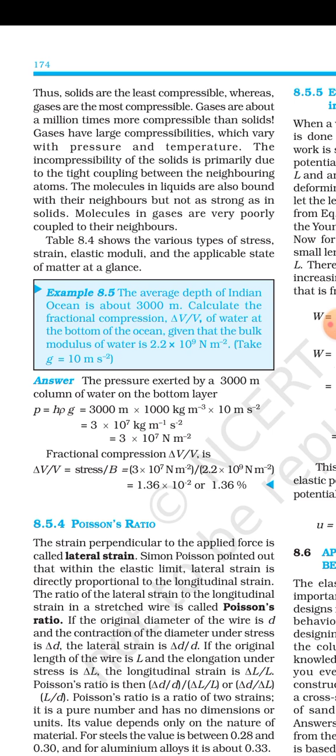The table shows the various types of stress, strain, elastic moduli and the applicable state of matter at a glance that we had studied. Now the question is, the average depth of the Indian Ocean is about 3000 meters. Calculate the fractional compression delta V by V of water at the bottom of the ocean given that the bulk modulus

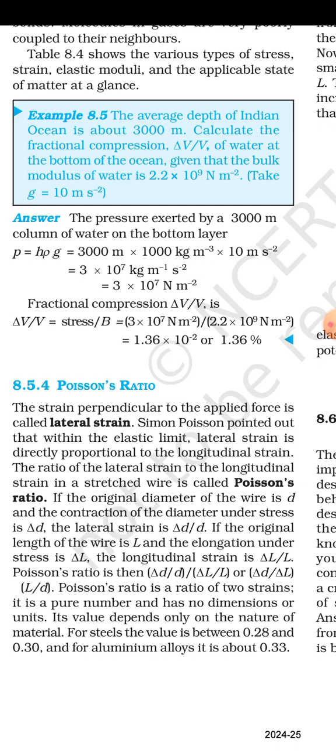Simon Poisson pointed out that within the elastic limit, lateral strain is directly proportional to longitudinal strain.

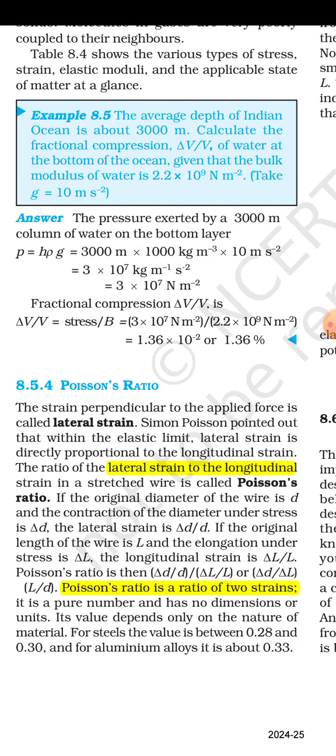It's a pure number, has no dimensions, no units. Its value depends only on the nature of the material. For steel, the value is between 0.28 and 0.30, and for aluminium alloy it's about 0.33.

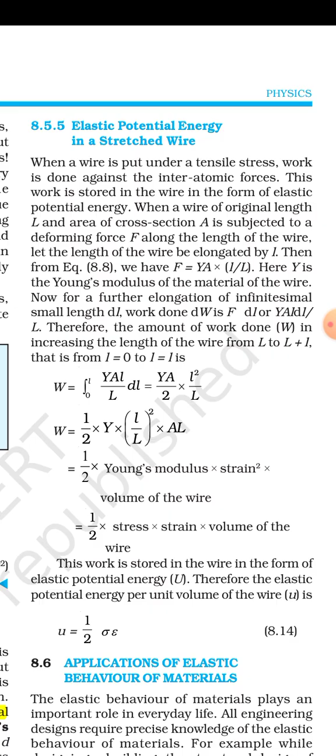When a wire is put under tensile stress, work is done against the interatomic force. This work is stored in the wire in the form of elastic potential energy. When a wire of original length L and area of cross section A is subject to a deforming force F along the length of the wire, let the length of the wire be elongated by l.

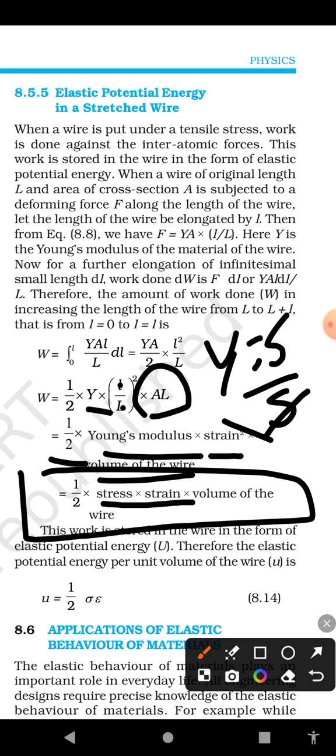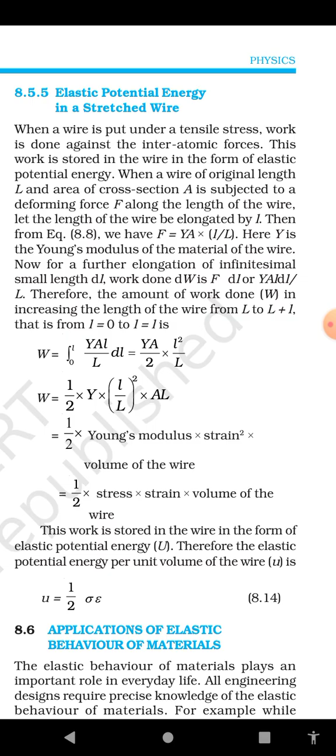The elastic behavior of material plays an important role in everyday life. All engineering designs require precise knowledge of the elastic behavior of material. For example, while designing a building, the structural design of the column, beam and supports require knowledge of the strength of the material used. Have you ever thought why the beam used in the construction of bridge or supports have a cross section of the type I?

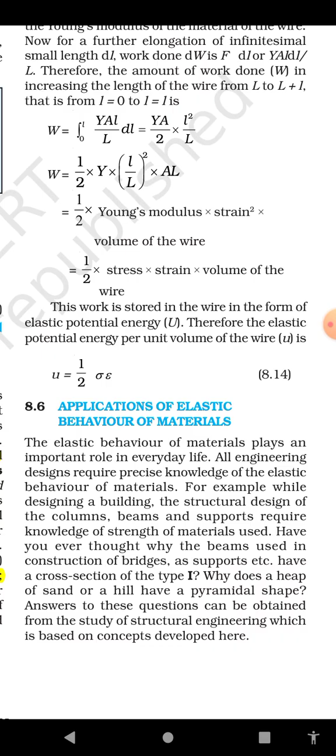Why does a heap of sand or hill have a pyramid shape? Answer to these questions can be obtained from the study of structural engineering, which is based on the concept developed here. Cranes used for lifting and moving heavy loads from one place to another have a rope to which the load is attached. The rope is pulled up using pulley and motor. Suppose we want to make a crane which has a lifting capacity of 10 ton or metric ton. 1 metric ton is 1000 kg.

How thick should the steel rope be? We obviously want that the load does not deform the rope permanently. Therefore, the extension should not exceed the elastic limit. From table 8.1, we find that mild steel has a yield strength of about 300 × 10^6 Newton per meter square. Thus, the area of cross section of the rope should be greater than W by stress.

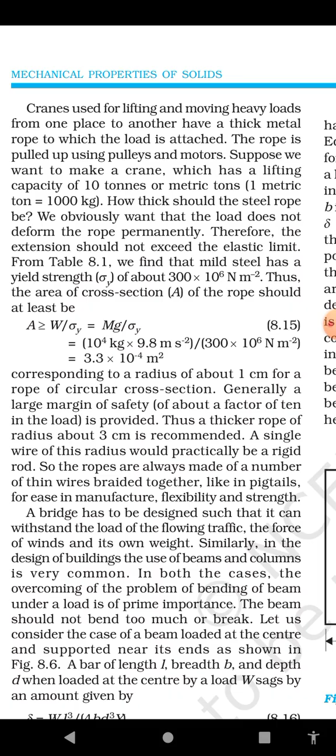For a rope of circular cross section. Generally, a large margin of safety is provided. Thus, a thicker rope of radius about 3 centimeter is recommended. A single wire of this radius would practically be a rigid rod, so the ropes are always made of a number of thin wires braided together like in pigtails for ease in manufacture, flexibility and strength.

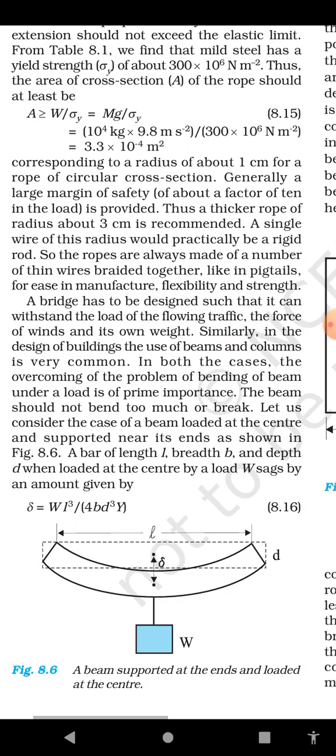A bridge has to be designed such that it can withstand the load of the flowing traffic, the forces of the wind and its own weight. Similarly, in the design of building, the use of beam and column is very common. In both the cases, the overcoming of the problem of bending of beam under a load is of prime importance. The beam should not bend too much or break.

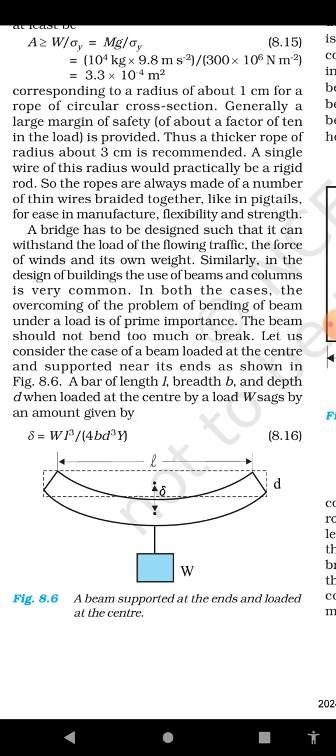Let's consider the case of a beam loaded at the center and supported near its end as shown in the figure. A bar of length L and breadth B and depth D, when loaded at the center by a load W, sags by an amount delta that is given by, you have to just memorize the formula, delta

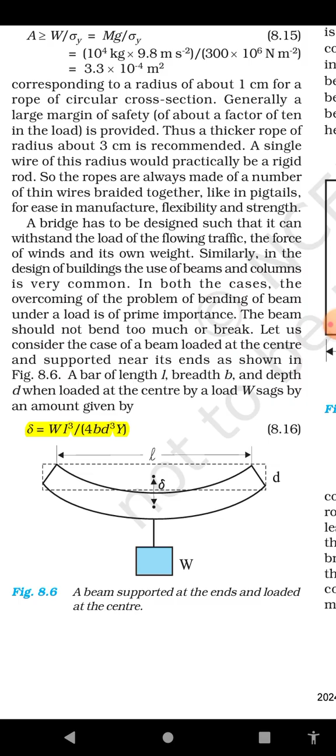The relation can be derived using what you have already learnt and a little calculus. From the equation we see that to reduce the bending for a given load, one should use a material with a large Young's modulus. For a given material, increasing the depth rather than the breadth B is more effective.

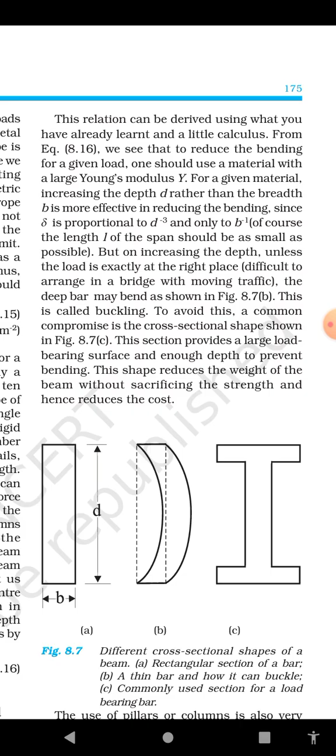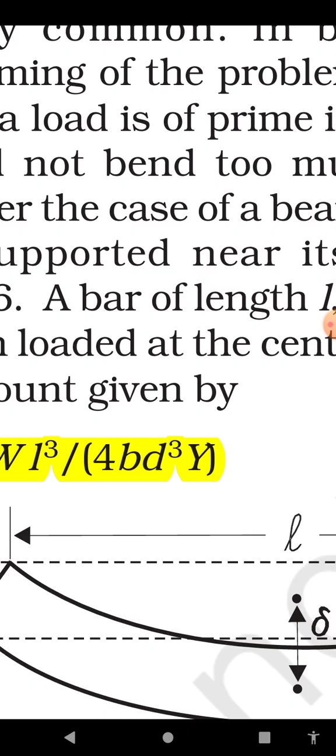For a given material, increasing the depth rather than B is more effective in reducing the bending. Since delta is proportional to D to the minus 3 and only to B inverse, the length of the span should be small.

But on increasing the depth, unless the load is at exactly the right place, difficult to arrange in a bridge with moving traffic, the deep bar may bend as shown in figure 8.7b.

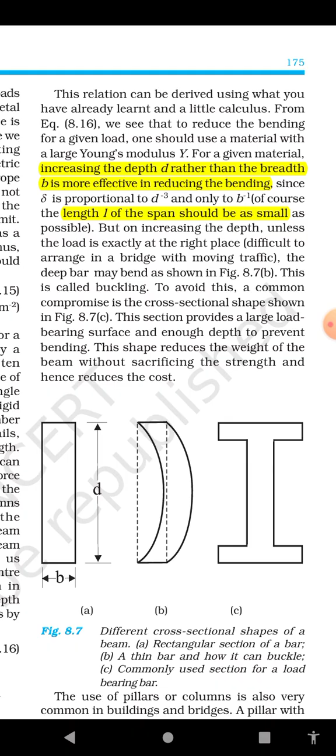This shape reduces the weight of the beam without sacrificing the strength and hence reduces the cost. The use of pillars or columns is also very common in buildings and bridges. A pillar with round ends, as shown in figure 8.9a, supports less load than one with a distributed shape at the ends.

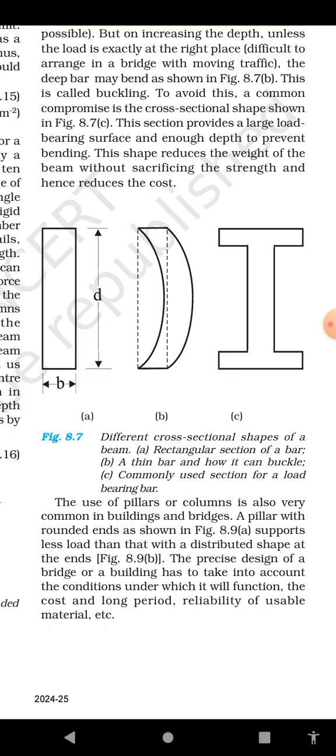The precise design of a bridge or building has to take into account the conditions under which it will function, the cost and long period reliability of the material used, etc.

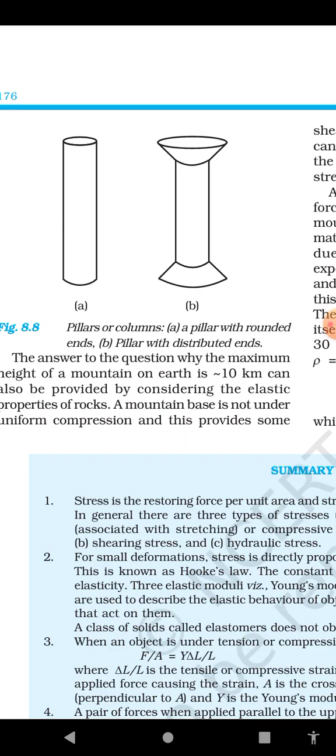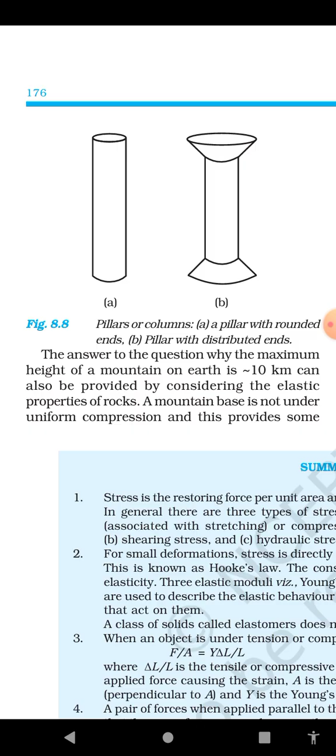The answer to the question why the maximum height of a mountain on earth is 10 km can also be provided by considering the elastic property of rock. A mountain base is not under uniform compression, and this provides some shearing stress to the rock under which it can flow. The stress due to all the material on the top should be less than the critical shearing stress at which the rock flows. At the bottom of a mountain of height h, the force per unit area due to the weight of the mountain is h rho g.

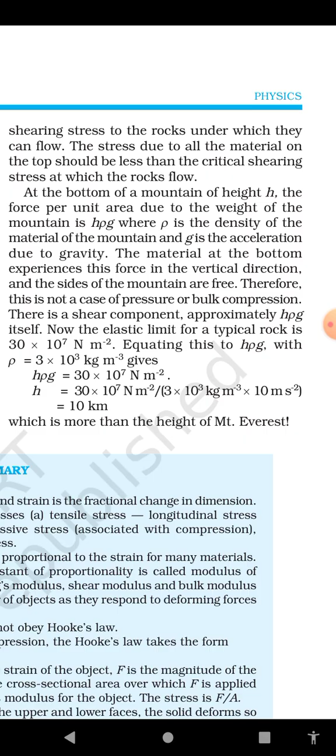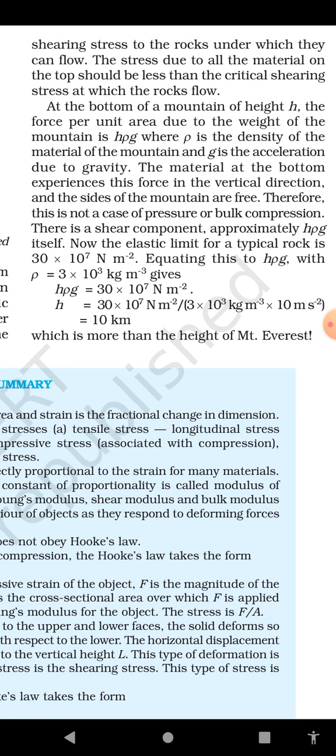The material at the bottom experiences this force in the vertical direction and the sides of the mountain are free. Therefore, this is not a case of pressure or bulk compression. This is a shear component, approximately h rho g. Now, if the elastic limit for a typical rock is this, equating this... it's just for time pass. Let's summarize.

Stress is a restoring force per unit area and strain is the fractional change in the dimensions. In general, there are three types of stress: tensile stress, that is longitudinal and compressive; second is shearing stress; third is hydraulic stress. For small deformation, stress is directly proportional to strain for many materials. This is known as Hooke's law. The constant of proportionality is called modulus of elasticity.

The elastic moduli, that is Young's modulus, shear modulus and bulk modulus, are used to describe the elastic behavior of objects as they respond to deforming forces that act on them. A class of solids called elastomers does not obey Hooke's law. When an object is under tension or compression, Hooke's law takes the form F by A is equal to Y, Young's modulus, times delta L by L.

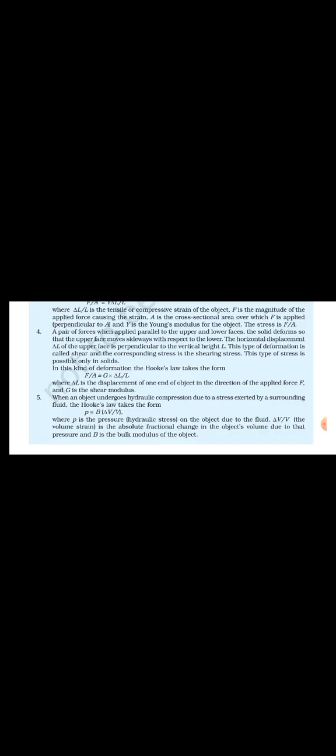A pair of forces applied parallel to the upper and lower faces of the solid deforms it so that the upper face moves sideways with respect to the lower. The horizontal displacement of the upper face is perpendicular to the vertical height. This type of deformation is called shear and the corresponding stress is called shearing stress. This type of stress is possible only in the case of solids. In this kind of deformation, Hooke's law takes the form F by A equals G delta L by L.

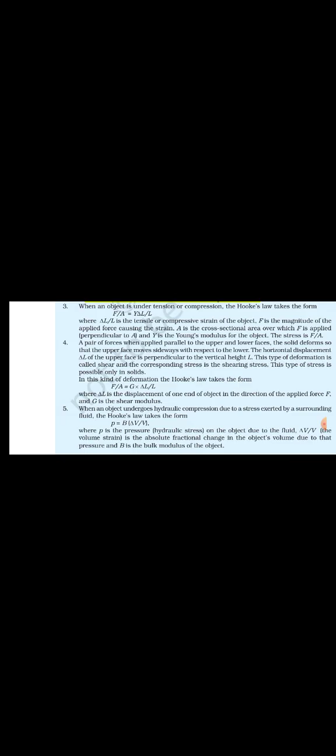When an object undergoes hydraulic compression due to stress exerted by a surrounding fluid, Hooke's law takes the form P equals B delta V by V. B is the bulk modulus, P the pressure, and delta V by V the change in volume due to the pressure.

Important points to ponder: in the case of a wire suspended from the ceiling and stretched under the action of a weight F suspended from its other end, the force exerted by the ceiling on it is equal and opposite to the weight. However, the tension at any cross section A of the wire is just F and not 2F. Hence, tensile stress, which is the tension per unit area, is equal to F by A. Hooke's law is valid only in the linear part of the stress strain curve.

Young's modulus and shear modulus are relevant only for solids, since only solids have length and shape. Bulk modulus is relevant for solids, liquids and gases, all three. It refers to the change in volume when every part of the body is under uniform stress so that the shape of the body remains unchanged. Metals have larger values of Young's modulus than alloys and elastomers. A material with a large value of Young's modulus requires a large force to produce small changes in its length.

In daily life, we feel that a material which stretches more is more elastic, but it is a misnomer. In fact, a material which stretches to a lesser extent for a given load is considered to be more elastic. In general, a deforming force in one direction can produce strain in other directions. Also, the proportionality between stress and strain in such a situation can't be described by just one elastic constant. For example, for a wire under longitudinal strain, the lateral dimensions will undergo a small change which is described by another elastic constant of the material called Poisson's ratio.